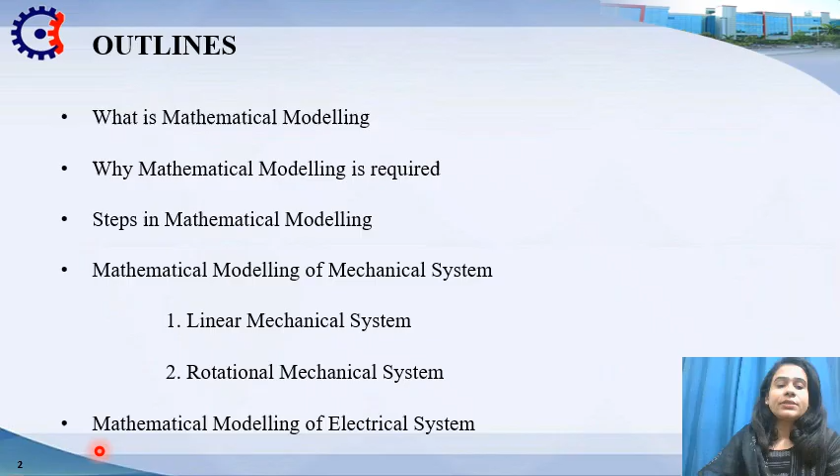These are the outline. What is mathematical modeling? Why is mathematical modeling required? Steps in mathematical modeling, and mathematical modeling of mechanical systems, which are of two types: linear mechanical system and rotational mechanical system. And mathematical modeling of electrical system.

What is mathematical modeling? Mathematical modeling is the process of representing a physical system using mathematical equations to analyze, predict and control its behavior. The control system can be represented with a set of mathematical equations known as a mathematical model. These models are useful for analysis and design of control systems.

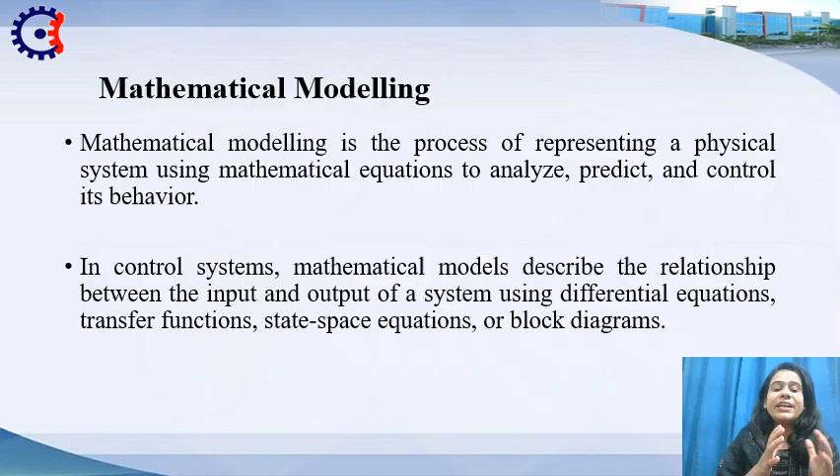Analysis of a control system means finding the output when we know the input, and design of a control system means finding the mathematical model when we know the input and the output.

Why is a mathematical model required? It is successful in many further applications, gives precision and direction to problem solution, allows the efficient use of modern computing capabilities, and prepares the way for better design or control of a system.

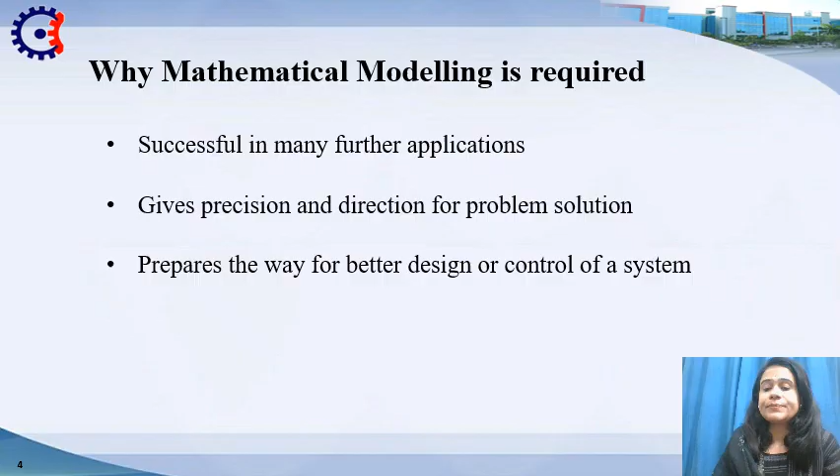Steps in mathematical modeling. Identify the input. Identify the system: mechanical, electrical, thermal, hydraulic, etc. And identify input and output. Input: excitation applied to the system, and output: desired response of the system.

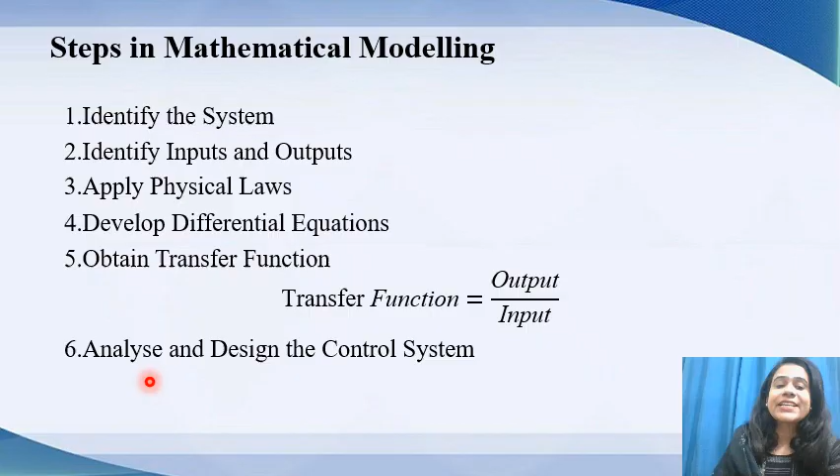Then apply physical laws. In a mechanical system, use Newton's law, and in an electrical system, use Kirchhoff's laws. Develop differential equations to represent the system dynamics mathematically. Fifth, obtain the transfer function: transfer function equals output over input. Six, analyze and design the control system.

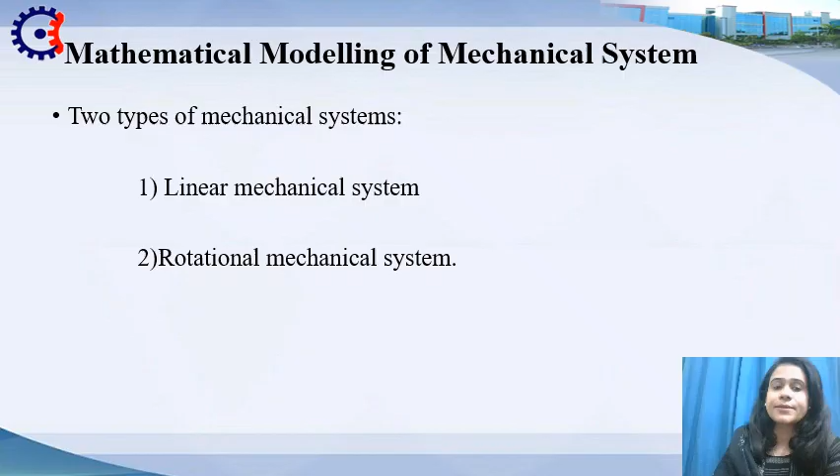Mathematical modeling of mechanical system. There are two types of mechanical system: first is the linear mechanical system, and second is the rotational mechanical system. A linear mechanical system is a system in which motion takes place in a straight line and the relationship between force and displacement is linear. That is, it obeys the principle of superposition.

In linear mechanical systems, we have three variables: force represented by F, velocity represented by V, linear displacement represented by X. And we also have three parameters: mass represented by M, the coefficient of viscous friction represented by B, and the spring constant represented by K.

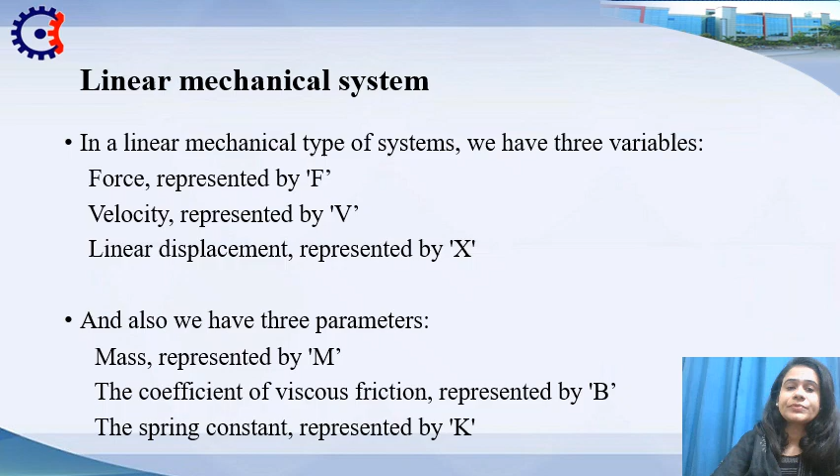This figure shows the linear mechanical system. Force F is applied toward the right side. The mass M starts moving and displacement becomes X; while moving, damper B opposes the motion and produces the damping force, and spring K compresses, creating a restoring force.

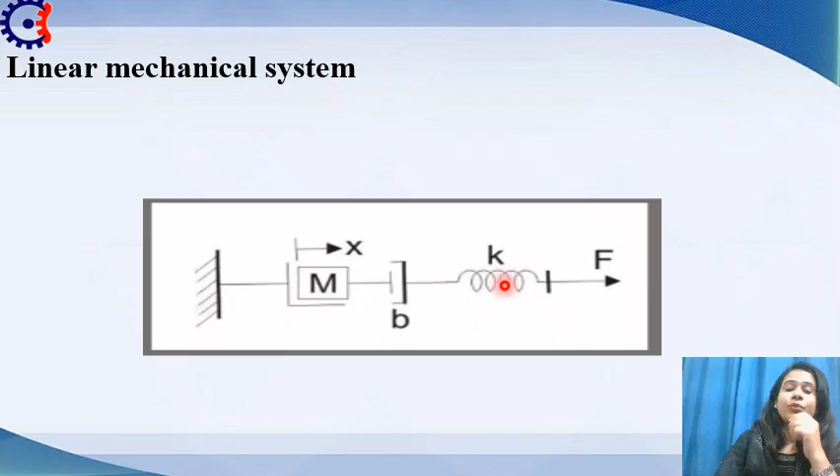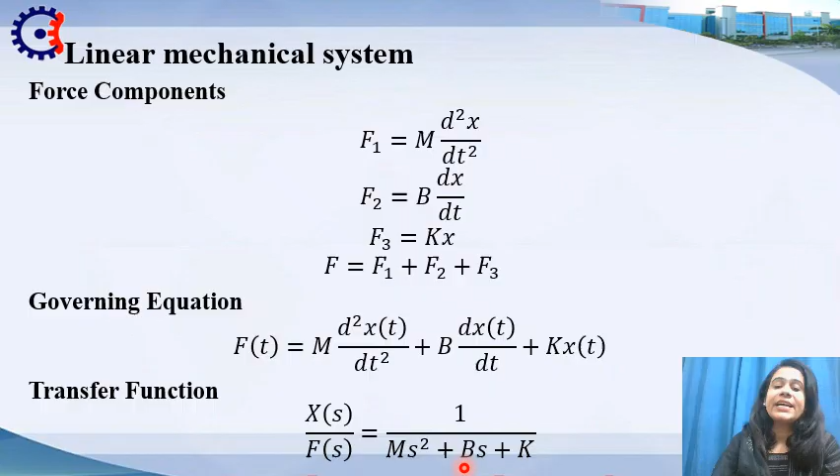Applications of linear mechanical systems. There are many applications. First is the automobile suspension system, using springs, dampers and masses to absorb road shock, reduce vibrations, and improve passenger comfort and vehicle stability. Then the elevator system uses controlled linear motion to move the elevator cabin smoothly and safely between different floors.

Railway suspension systems reduce vibration and impact between the train wheels and coach body, ensuring passenger comfort and track safety. Loudspeaker cone motion converts an electrical signal into linear back and forth movement of the speaker cone to produce sound waves. Robotic linear actuators provide precise linear motion for robotic arms and automated machines used in positioning, lifting, pushing and pulling operations.

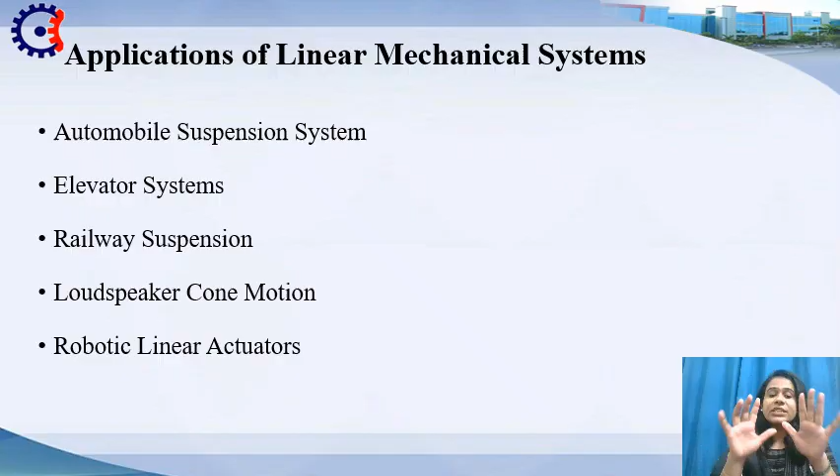Rotational mechanical system. A rotational mechanical system is a mechanical system in which motion occurs in the form of angular displacement, meaning rotation, rather than linear displacement. Variables of a rotational mechanical system: torque represented by T, angular velocity represented by omega, and angular displacement represented by theta. And parameters of a rotational mechanical system: moment of inertia represented by J, rotational friction coefficient represented by B, and spring constant K.

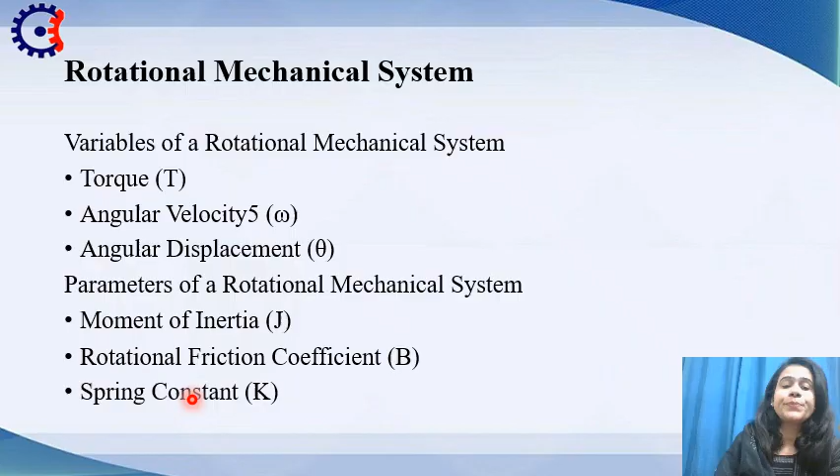Rotational mechanical system. These figures show the rotational mechanical system. In this figure, torque T of t is applied to rotate the body. The cylinder starts rotating and produces angular displacement theta of t. During rotation, inertia J resists change in rotation and damper B opposes angular motion due to friction and produces damping torque.

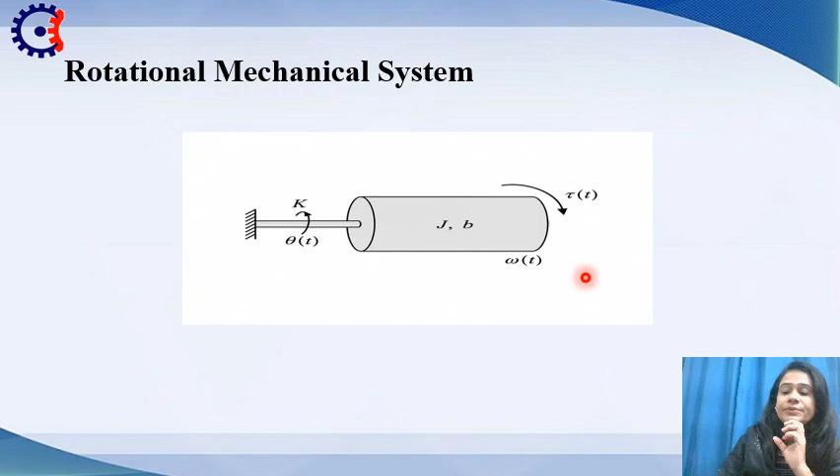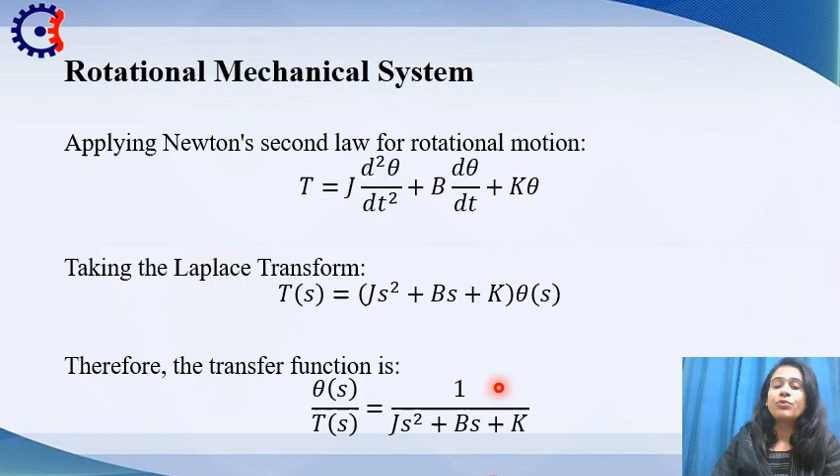Rotational mechanical system. Applying the second law for rotational motion, we get this equation: T equal to J d square theta upon dt square plus B d theta upon dt plus K theta. Taking the Laplace transform of this equation, we get this equation, and this is the transfer function of the rotational mechanical system: theta of s upon T of s equal to 1 upon Js square plus Bs plus K. This is the transfer function of the rotational mechanical system.

Applications of rotational mechanical system. DC motors, used to control the speed and motion of rotating shafts in industrial machines. Robotic arm joints, for precise angular movement and positioning of robot links in manufacturing and surgical robots.

Antenna positioning systems, used to accurately rotate antennas for tracking satellites, radar targets and communication signals. Servo control systems, used for high precision control of angular position, speed, and torque in CNC machines and automation equipment. Aircraft and automobile steering mechanisms, used to control the angular movement of rudders, elevators, and ailerons for stable flight and maneuvering.

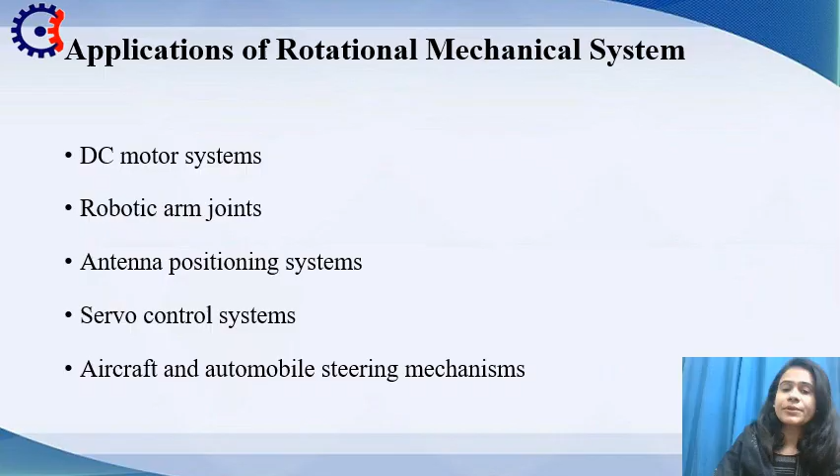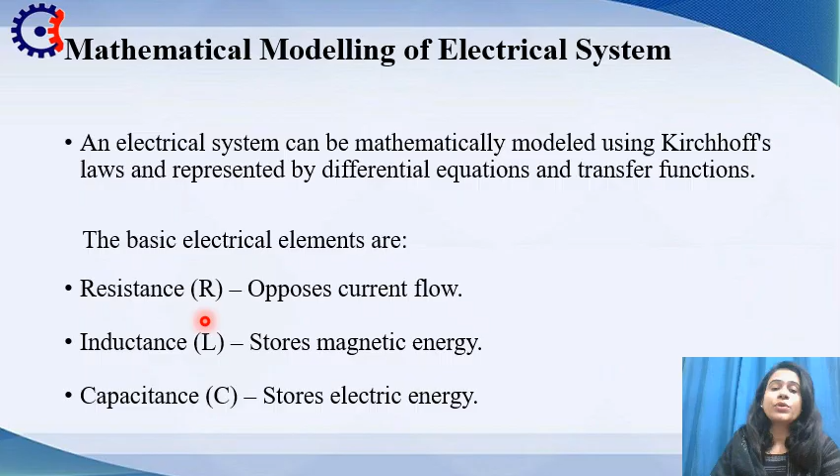Mathematical modeling of electrical systems. An electrical system can be mathematically modeled using Kirchhoff's laws and represented by differential equations and transfer functions. The basic electrical elements: resistance, which opposes the current flow; inductance, which stores magnetic energy; and capacitance, which stores electric energy. Electrical element equations: resistor according to Ohm's law, V equal to Ri, and this is for the inductor. This is the capacitor, V equal to 1 upon C integral i dt.

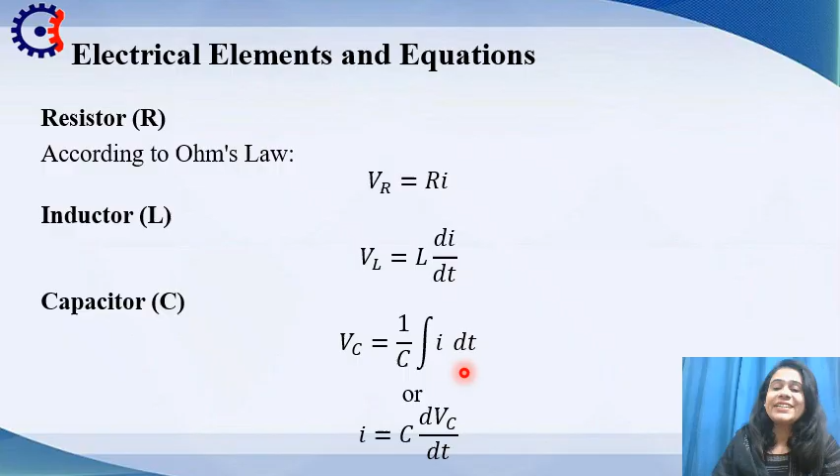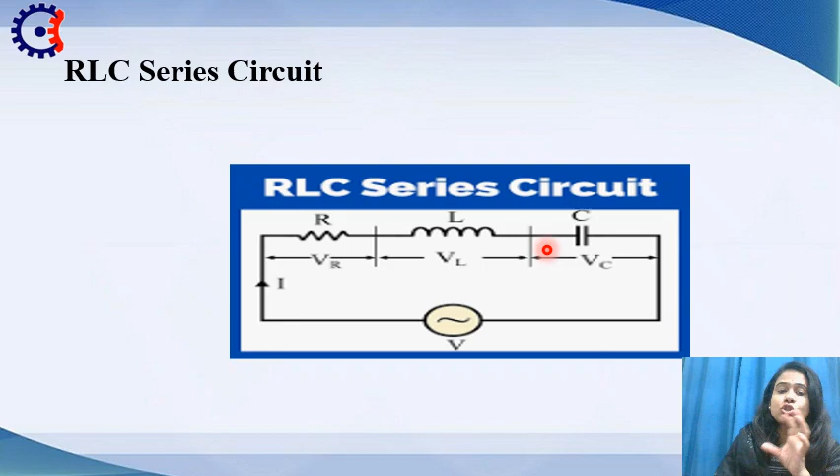RLC series circuit. This diagram shows an RLC series circuit. In this circuit, the resistor, inductor, and capacitor are connected in series, so the same current i flows through all components.

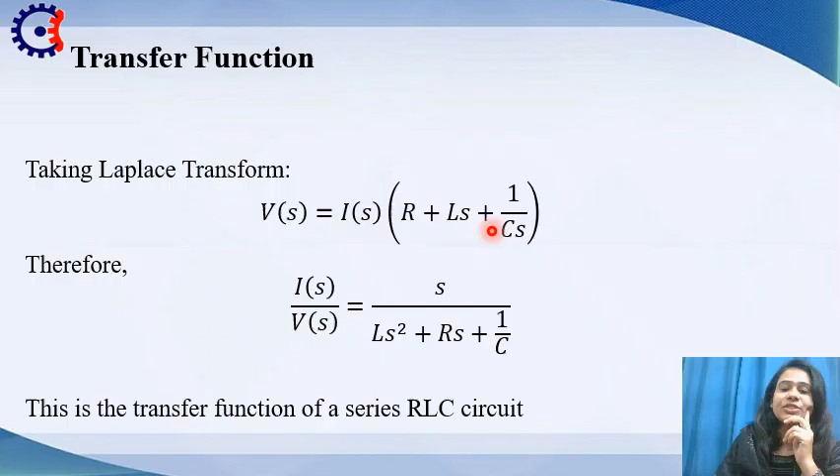Mathematical modeling of electrical system. Applying Kirchhoff's voltage law, V of t equal to VR plus VL plus VC. Substituting the element equations, we get these equations, and differentiating, dV(t) upon dt equal to R di upon dt plus L d square i upon dt square plus i upon C. Transfer function. Taking the Laplace transform of these equations, we get the transfer function of the series RLC circuit. This is the transfer function of the series RLC circuit.

Applications: power systems, used to analyze, control, and improve stability of electrical generation, transmission, and distribution networks. Electronic filters, used to remove unwanted frequencies and improve signal quality in electronic circuits. Communication systems, used for signal processing, modulation, transmission, and distribution of information over communication channels.

Robotics and automation, used to control sensors, actuators, and robotic movement for precise and automated operation. Electrical drives, used to control the speed and torque of electric motors in industrial machinery, elevators, and conveyor systems.